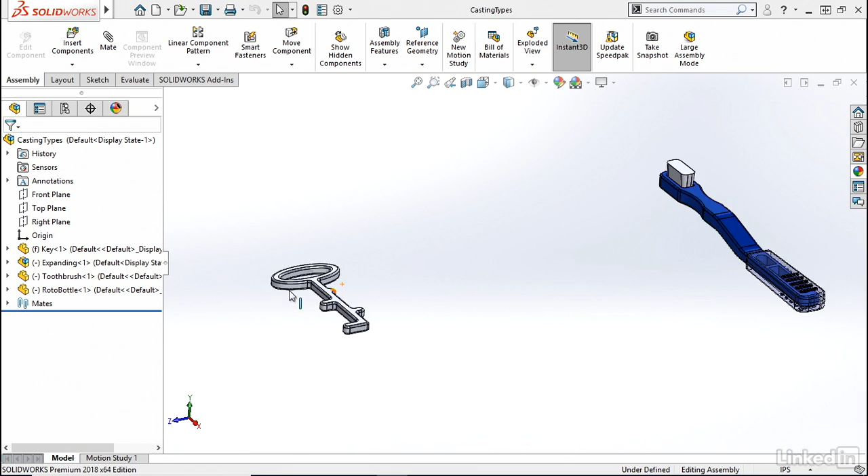The first type of casting we'll talk about is the most common type, a solid casting. In solid or standard casting, the entire cavity of your mold is filled with one material, resulting in a solid cast component. I recommend solid casting for small to medium parts. If you decide to cast a larger solid, the weight could become an issue and the cost increases. The more material you use, the more expensive it is, so many designs minimize unnecessary bulk.

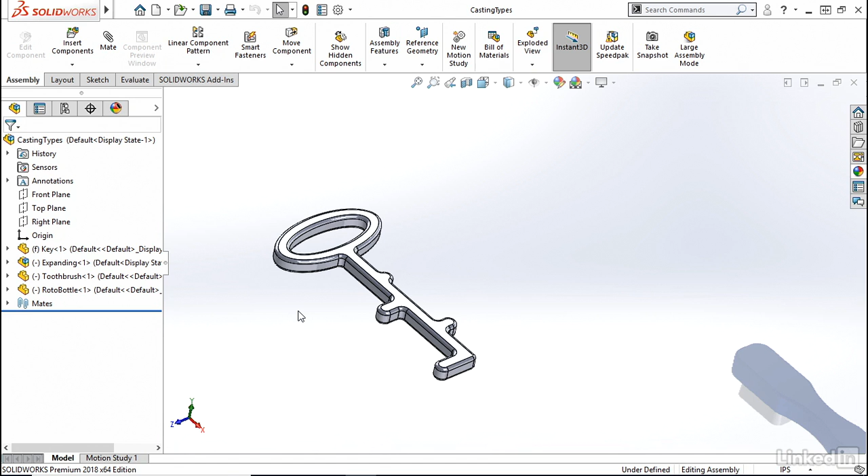Large volumetric plastic parts made with factory methods found around you are generally hollow with structural design features and consistent wall thickness. These parts would still be considered a solid casting because the mold itself creates a solid vessel, even if it has a complex topography.

Combination casting or overmolding is a process of casting a part in more than one cycle, usually combining materials into a single product. The most common example you might know with overmolding is a toothbrush. Handles are often made of 3 or more types of material to create the desired textural combination of soft grip and structural handle. This makes use of the unique characteristics of multiple materials.

A specific portion of the part is molded usually with a harder material and cooled. It's then placed in a second mold with bristles to add the rubberized grip material, which will bond with the final part and becomes one toothbrush. Sometimes, plastic parts are molded over metal inserts, which can be very helpful for electronics.

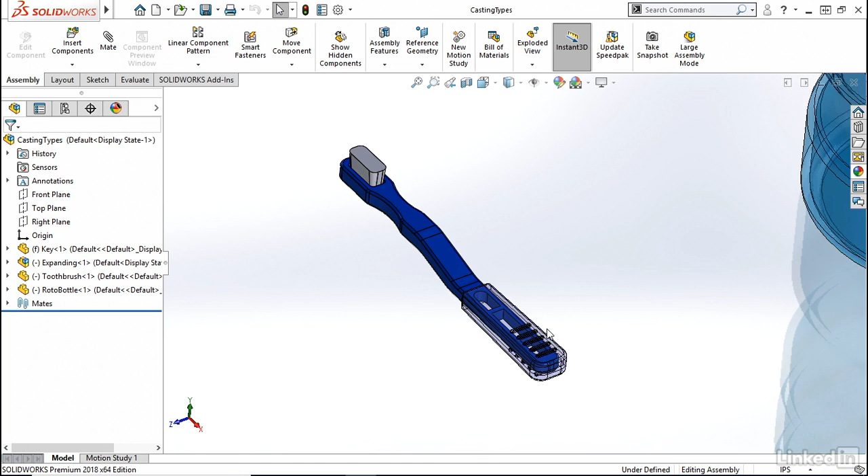And lastly, overmolding often requires a mechanical method of bonding the two materials together so that it can grip together and bond. Adhesive bonds are useful, but the strongest bond is a combination of chemical bonding and mechanical bonding.

Rotational casting, or rotocasting, is a method whereby the mold cavity is filled partially while being rotated, so that the curing or cooling material fills a near equal layer of material on every surface of the mold. This results in hollow components that maintain their exterior detail and texture, but don't have an exact wall thickness. The material melts, flows, and contacts all parts of the mold at its lowest gravitational point because it's not filled by force. There are limited inherent stresses and it can be very strong.

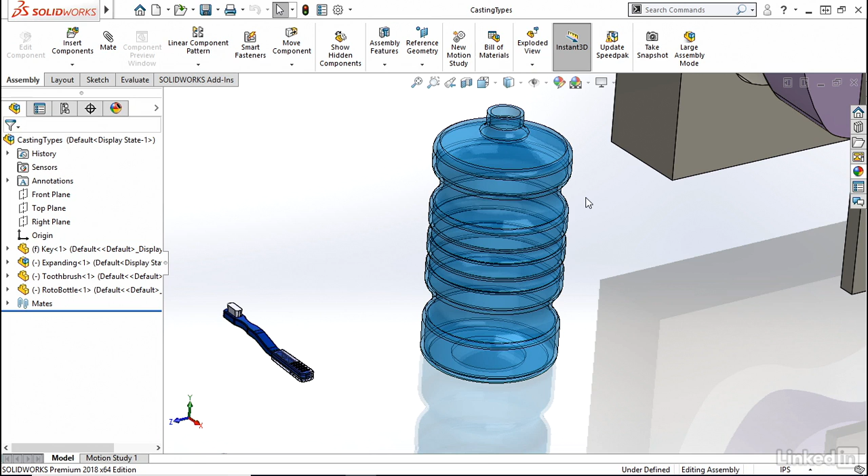Rotational casting is well suited for projects that don't have interior mechanisms or specific project needs for exact wall thicknesses. I didn't name these methods, and they can get a bit confusing. But rotational molding is generally for thermoplastics and involves a heating element where it heats up the plastic and then cools it down. Rotational casting uses thermoset resin materials that combine and cure, doesn't heat up at all, and can be done by hand for short-run projects.

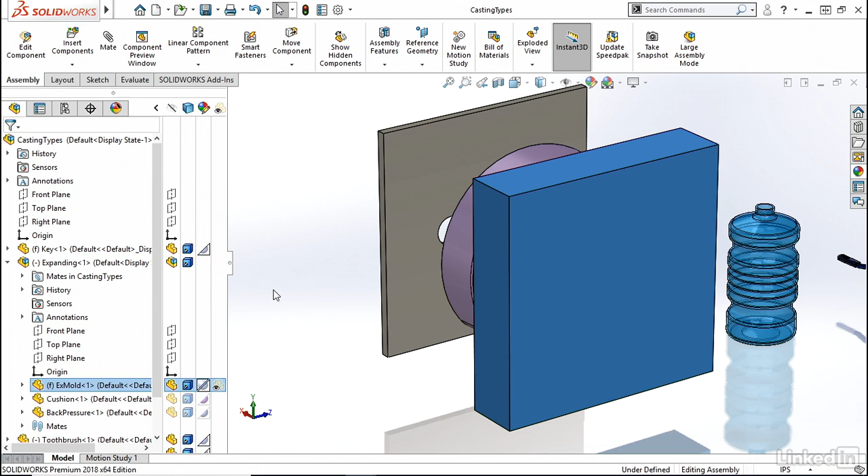Another kind of casting is with the use of expanding foams. Some of them can expand up to 18 times their original volume. In this example, I have a cushion. I'm going to expand this subassembly and then just make this back part transparent. Close that back up. This type of casting has some special considerations for where your inflow will go and how many outflow ports you'll need to design into your project, which are these.

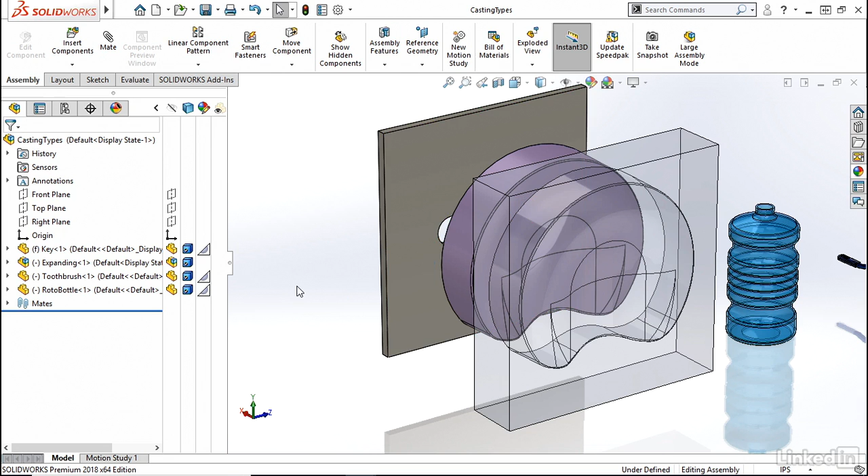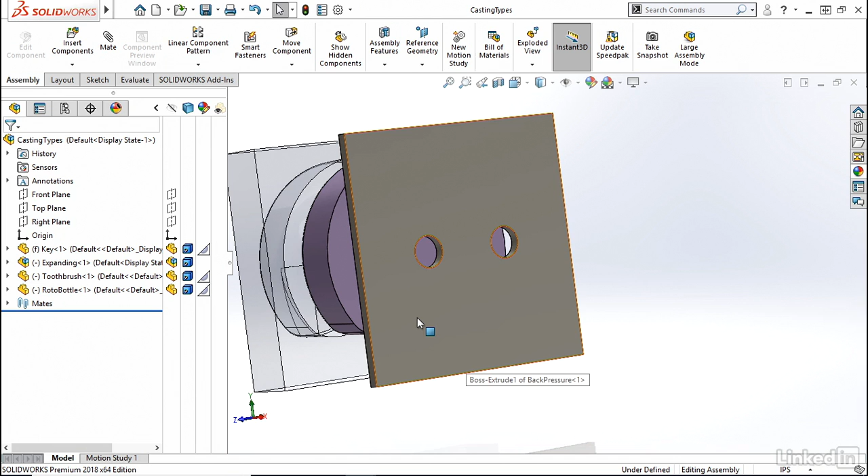Contributing factors like heat and moisture will affect the process, so pay close attention to those factors on your specific material. This method is often used for projects that will have an unseen back face. This is an opportunity to use back pressure and have an open-faced pour. This board is what would be considered back pressure and has these outflow ports here. You need those so that after pouring material, the mold will fill all the way up to the corners before evacuating via the outlets. Foams are also sometimes used to fill hollow rotational molds for things like insulated coolers or flotation devices.

I hope this has given you a few ideas for how you can combine casting methods to make the most of your projects. Each method has its own pros and cons, so choose wisely.